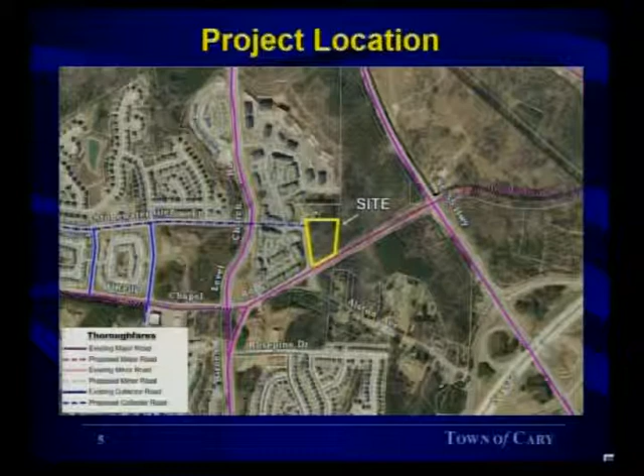Existing conditions, like I said before, it's already under construction. We don't have a good aerial photo. The site plan 13 SPO 35 was approved by the town in December of 2013 administratively. That plan was for a 16,000 square foot daycare, which is the larger building located toward the intersection, and an additional 12,000 square foot of office located toward the rear of the property.

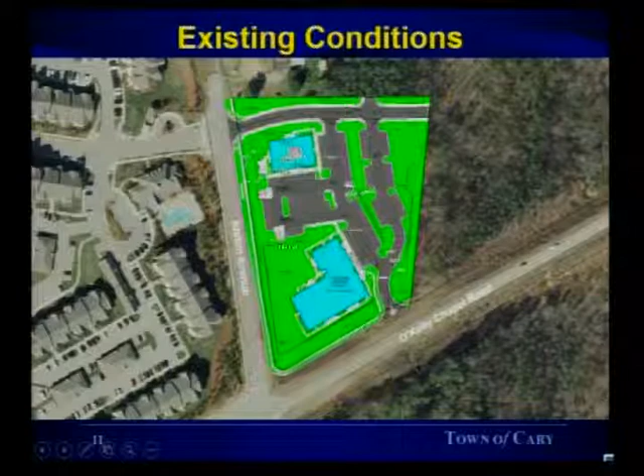To give you an idea what that looks like, this is a shot from the intersection of Alston and O'Kelly Chapel Road looking east toward Parkside Town Commons. The daycare building is shown there on the downhill side of the property. You see a little bit of the widening that was done on O'Kelly Chapel Road. And then the office pad would be in the rear of the building, and the playground is currently under construction, the playground area for the daycare.

So as part of that original plan approval in December of 2013, the applicant was required to show a reclaimed water line, approximately 459 feet of 12-inch reclaimed water line along the southern property frontage. They chose during the plan approval process to put that on the southern side of O'Kelly Chapel Road, and that's shown in the approximate location of the yellow dashed line on this plan.

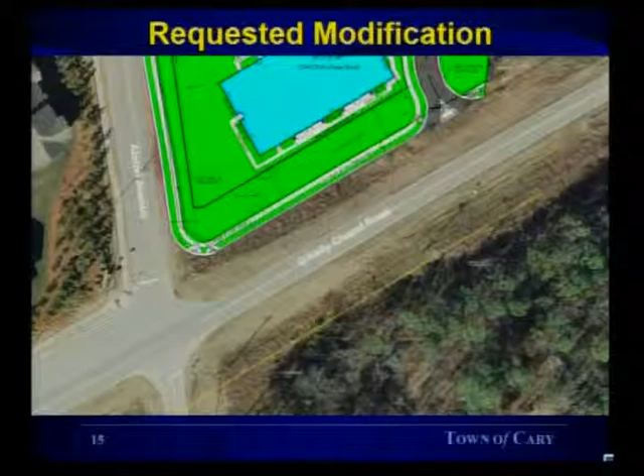The applicant is before you tonight requesting to modify that approved site plan to remove that reclaimed water line and to make no payment in lieu of construction of that water line. That concludes staff's presentation. We'll bring the applicant up at this time, and then staff will be back to provide their professional observations following the applicant's presentation.

Thank you. Thank you, Mr. Hales. At this time, we'll call on the applicant's attorney to present arguments and evidence in support of the application by addressing the applicable approval criteria.

Thank you, Mr. Mayor, members of the council. Jason Barron with Morningstar Law Group here on behalf of the applicant. Here with me tonight is Mr. Bill Daniel, Bill Daniel and Associates. They're the engineers for this plan.

I don't quibble with the presentation that Kevin gave with respect to ultimately what the request is. Essentially this is a request for approval of a site plan modification, but it comes down to this reclaimed water line, which you can see on the slide is on property owned by third parties.

Pursuant to the town's policy statement 132, included in the staff's presentation, developers of property in areas designated for reclaimed water lines are responsible for the full cost of reclaimed water facilities within their own properties. This clearly is not on their own property. The real genesis of this request is they don't own it, so they don't have the ability to deliver the line in question.

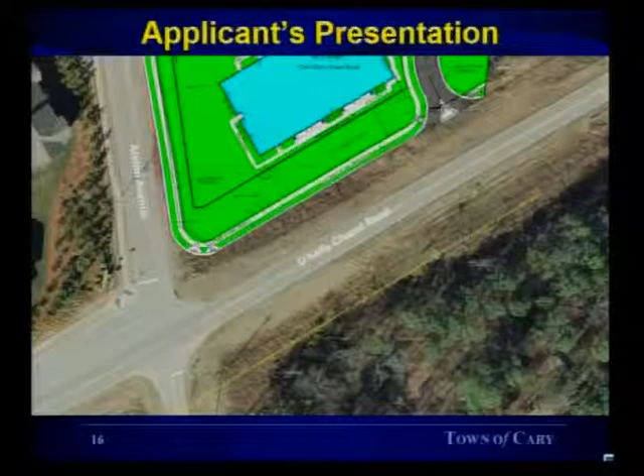So the reason why the reclaimed water line is shown on the south side of O'Kelly Chapel Road is because that's where the reclaimed water line is. That's where Evans Farms Townhomes is building it, and at some point, I imagine, it will be extended across, under Alston Avenue and along the south side of O'Kelly Chapel Road as well.

So it was a change made to the plans during the planning process, but the genesis for that change was reflecting the fact that MI was putting that reclaimed water line on the south side of O'Kelly Chapel Road. So from my client's perspective, that is the justification for not requiring this owner and applicant to put that line in—because they don't own it, and the reason they don't own it is because it's planned to go across property owned by third parties. So with that, I will call Mr. Bill Daniel to testify as to the plan's compliance with the other requirements for approval of a site plan.

Good evening. My name is Bill Daniel with William G. Daniel and Associates, engineers for the project. Even though I know the real focus here is on the water line, I understand the process is essentially a reapproval of the site plan, so the features included in the site plan need to be addressed in the record. I will, in a rather stilted fashion, address those items briefly.

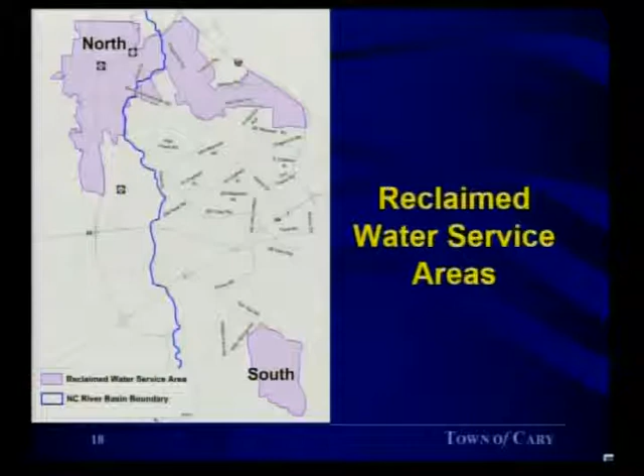This is a clip, the second slide, from the town's master plan, which shows the location of the site. All-Starz is located on O'Kelly Chapel Road, which the master plan calls for a 12-inch water line to be installed.

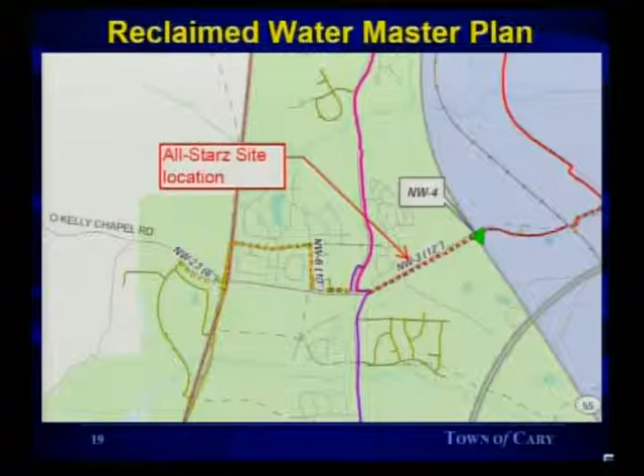With the one large parcel to the east that could develop in the near future, if this line is not constructed, there would be a significant gap in the system, which would feed live reclaimed water all the way from Green Level Church Road down to Parkside Town Commons, the large commercial development down at 55.

If this waiver is granted, the town would have to construct this line at an estimated cost of up to $60,000. And with that, I'll turn it back over to Mr. Hales.

Just to summarize for council, there are two decisions before you tonight. The first being the request for the waiver to the reclaimed water line with no payment in lieu. Mr. Bissonnette just covered a lot of the staff observations, so I won't repeat them here. The second would be an action on the site plan itself, which really the only difference between the new site plan and the old one is the elimination of the reclaimed water line. If you have any questions, we'll be available. Thank you. Okay, thank you.

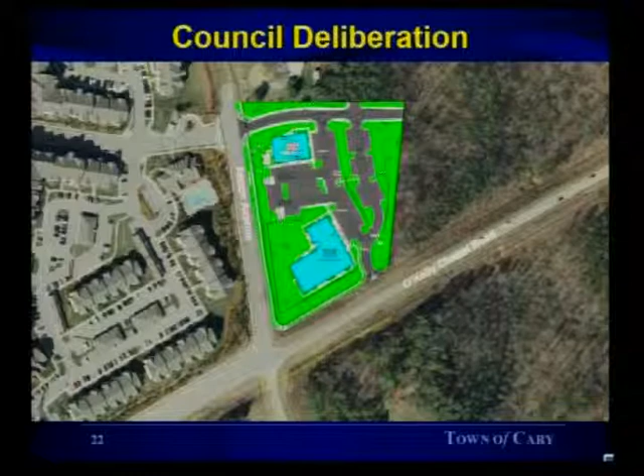Can you put back the last page that Mr. Hales had up there? The modification summary or the area? The summary, yes, that one. Thank you. Okay, thank you.

At this time, I'll invite cross-examination of the town witnesses. Mr. Barron? Nope? Okay. If anyone's been sworn in and has objections to the competency of any testimony, I'd invite you forward. Does either party believe that new evidence has been presented tonight that warrants a continuance of the hearing? Okay, continuing, we'll now begin the deliberative phase of the hearing.

Do council members have questions or comments? I have questions. One of the statements made is that the applicant feels like they have paid in more because they had to tie into a road that is centered on the easement, the road easement, versus having the two lanes. My question is, why aren't we requiring the developers along that corridor to widen the road to its future corridor?

They are. It's an existing two-lane road today. It's proposed to be a 4-lane median divided facility, so they were required to widen two additional lanes outside the existing lane.

Are they doing that? Correct, they are making road improvements consistent with the CTP. So they're doing their road requirement, and if they're doing their road requirement, there's no extra cost then of tying in further to what they need to tie in.

Correct, and here's a better shot. I didn't include it earlier, but it shows the additional two lanes of widening with the new curb and gutter. And when did they come in and ask you for this line to be moved to the other side of the street? It was part of the original approval. It hadn't been changed since.

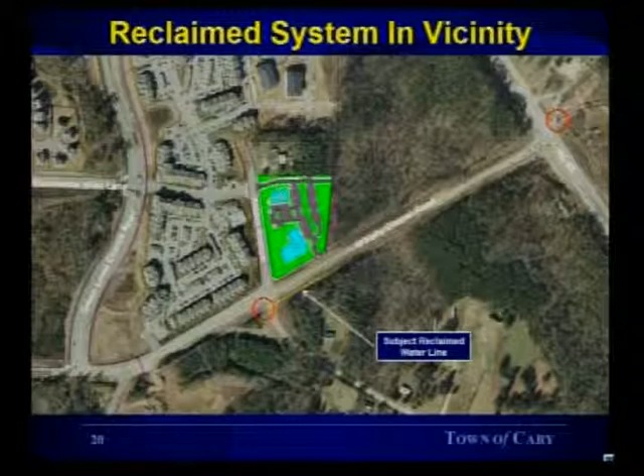But in this particular case, the one thing that is clear to us is the reclaimed water line needed to be on the other side of the road. Now, with it being on the other side of the road, you've got to think about placement. This road is going to be much wider than it is now. We had to dedicate considerable right-of-way and make considerable widenings because the existing roadway is essentially going to be a median in the ultimate section. We had to build the section that's going to exist outside that, more or less. That's really a bit of an overstatement, but it's not far off.

And now with the water line on the other side of the road and that being an undeveloped parcel, it needs to go on that side of the road, but that parcel is not ready to develop. When that parcel is ready to develop, they will have to dedicate additional right-of-way. They will have to build additional roadway, and the water line needs to be installed not next to the existing right-of-way that's there now, because that's going to be under pavement. It needs to be constructed farther to the south than the existing right-of-way.

It needs to be constructed just off of where the ultimate right-of-way is going to be. And that water line needs to be constructed and designed in concert and coordination with the water lines, sewer lines, storm drain, everything that's involved in the improvement of frontages along that road. It logically needs to be constructed as a part of the development that occurs on property across which it's going. And that's the reason we requested the shift, and I think that's the logic.

Now, in all fairness, during the review process, we knew that that was going to be the case. We thought this would all be developed at the rate everything was happening out here. We thought this would probably be a moot point because we thought with the speed of development that water line would be installed. And that is the case with the part through the townhome. And I understand there's considerable interest down here in this larger tract. But our tract has developed faster than that corner parcel.

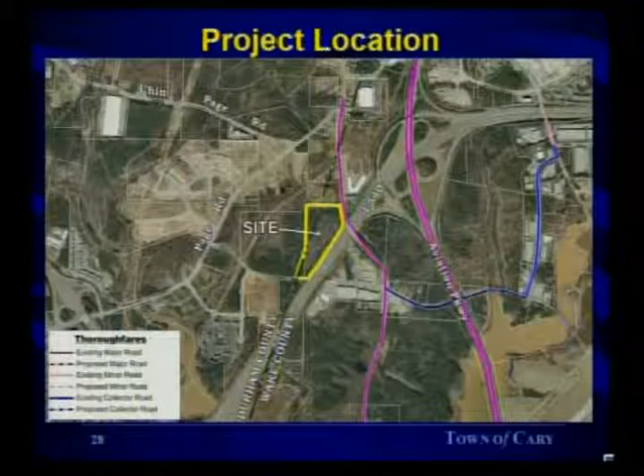The site is currently wooded, it's forested. There are 2 large diameter potential champion trees located in this corner of the site near the overpass. They're not proposing any development in that portion of the site, and those trees are to be preserved on the property.

The request is for a site plan for approval of a 102,000 square foot school. The site has access from both Pleasant Grove Church Road in the northeast and Comstock Road coming out of Durham County to the south. The road access off of Pleasant Grove Church will predominantly be for parents and student drop-off, and bus access will be from the southern part of the property. Stormwater treatment will be handled in a stormwater device within the bus loop.

The portion in Durham County, you'll notice, has no buildings or structure improvements. It's being used strictly for emergency access to the rear of the building and for queuing during the parent drop-off and pickup times.

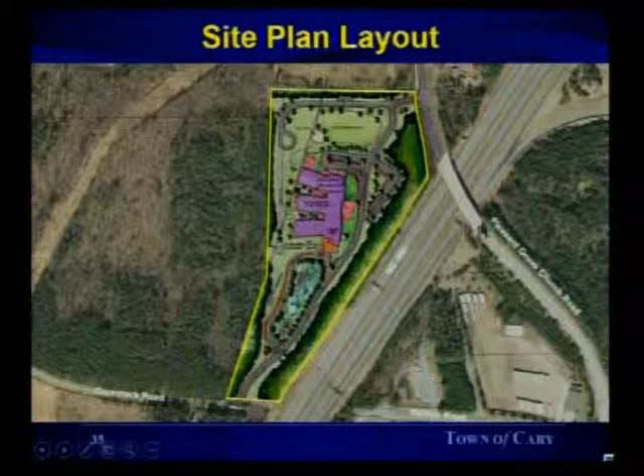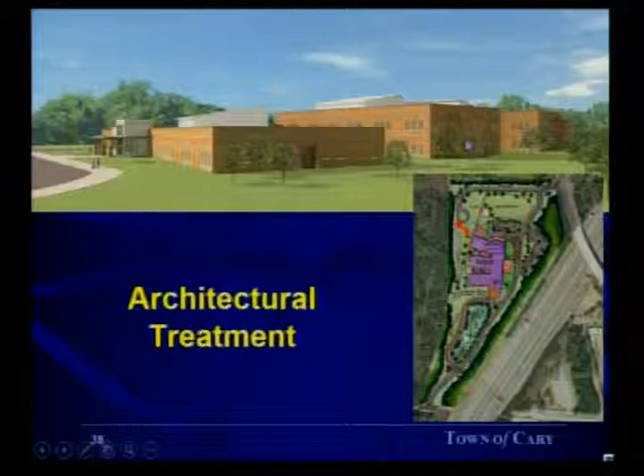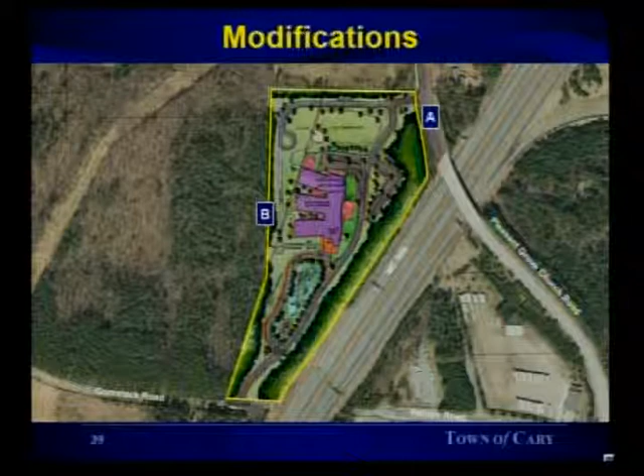The site plan does include 2 modifications to the town's development regulations. Modification A is a request for a payment in lieu for half of the median required in Pleasant Grove Church Road, as well as sidewalk from the property line, or from the access drive headed south toward the bridge. The second is an elimination of connectivity to the west, to the vacant property to the west in Durham.

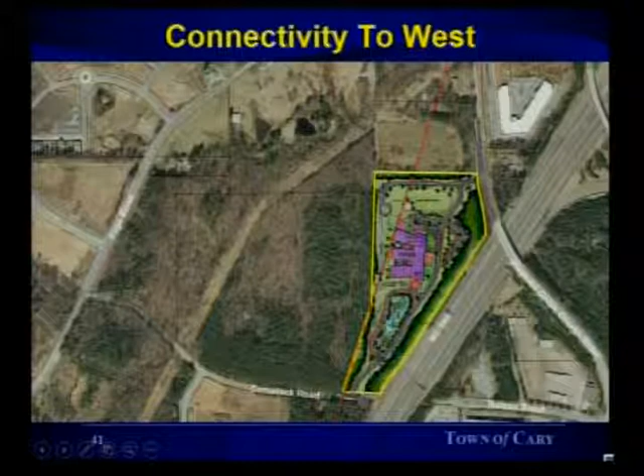That concludes staff's presentation this time. We'll be back after the applicant's presentation to provide you some additional observations. Thank you. This time we'll call on the applicant's attorney to present arguments and evidence in support of the application by addressing the applicable approval criteria.

Good evening, Mr. Mayor and members of the Town Council. My name is Kenneth Haywood, Post Office Box 1429 in Raleigh. I am with the law firm of Boxley, Bolton, Garber, and Haywood, and I'm very pleased to be before you again tonight with another school to talk to you about in terms of the town of Cary.

I am here on behalf of the Wake County Board of Education to talk to you about an elementary school tonight.

There are, as you have heard from staff, a number of different requests and approvals before you. Let me very quickly talk to you about some of the individuals we have tonight that will be presenting evidence in support of these requests before you.

We have Ken Loring, who is a civil engineer with CLH Design, Renee Pfeiffer, who is a landscape architect and site designer with CLH Design. We have Jeff Hockendale with SEPI Engineering. We have Jim Copeland, Mosley Architects. We have Sherry Green and Betty Parker with the Wake County School System. We have Michael Moore, who's a state certified general appraiser, to talk in terms of real estate appraisal information.

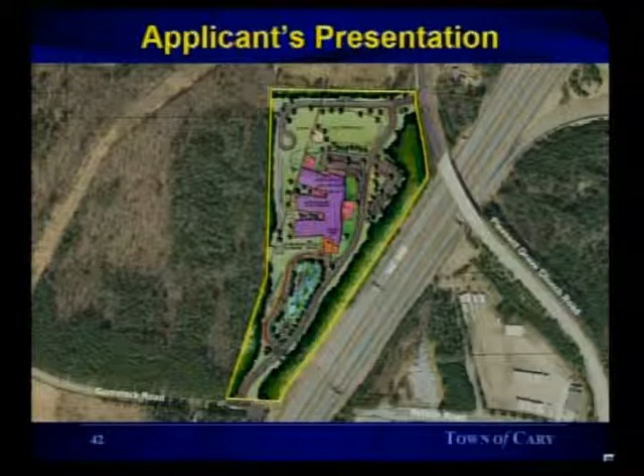At this point, I'll hand it over to our traffic engineer, Jeff Hokenottle, to discuss some additional roadway improvements. Thank you.

Hi, my name is Jeff Hokenottle. I work with SEPI Engineering. I am SEPI Engineering's Traffic Engineering Department Manager. I have 15 years of experience in traffic engineering, and I'm a registered professional engineer in North Carolina.

We conducted the traffic study, and as mentioned several times, we included a 900-student core capacity, so we looked at all future trips from this site. The study was completed and reviewed by the Division 5, District 1, District 2 engineers, congestion management, MSTA section, City of Durham, and Town of Cary, and has been reviewed and approved to help mitigate congestion as shown in the map. I'll start with the intersection at World Trade and Page Road.

The green improvements shown, as well as the blue, are the responsibility of Wake County Public Schools. Looking at Page Road and World Trade Boulevard, we'll monitor the intersection for signalization. We're going to be restriping World Trade Boulevard to include 200 feet of storage for a left turn lane, as well as a shared left and right turn lane at that location.

As Renee mentioned, we're going to construct a 100-foot storage southbound right turn lane at site driveway 1, and a northbound left turn lane at site driveway 1 as well, and construct a cul-de-sac on Comstock Road. The red and yellow improvement requirements are to be completed by an adjacent development, with Wake County Public Schools to participate in either funding of those improvements.

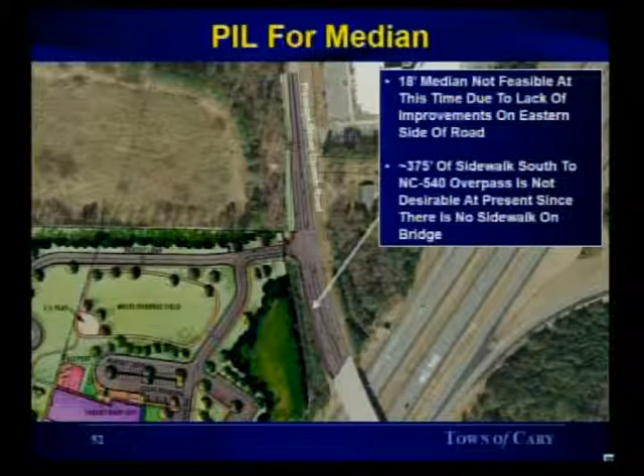The sidewalk to the south—there is no sidewalk farther south along Pleasant Grove Church Road, or more importantly, crossing the bridge itself. So any sidewalk provided along this frontage would dump pedestrians directly into the travel lane on the bridge. There's no provision for a pedestrian there, so that just is not desirable at this time.

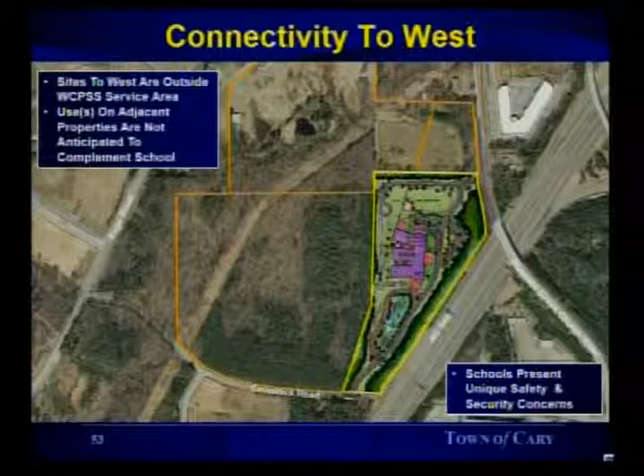Connectivity to the west—again, it's a school. The surrounding property is not really zoned or anticipated to develop with uses that are compatible to that type of use, as well as the unique safety and security concerns with controlling access to a school campus. That concludes staff's observations this time. We'll be available if you have any questions.

Thank you. Okay, this time I'd invite any cross-examination of staff's comments. No? All right. We'll now invite anyone who's been sworn in if they have any objections to the competency of evidence or testimony. Seeing none, does either party believe information's been presented tonight for a continuance of this hearing?

We'll now begin the deliberative phase of the hearing. Council members, questions or comments?

I think, and maybe Kevin you could correct me, but by annexing this property, Cary is now entering into the third county. Is that right? Have we already been in Durham County before? We're not annexing the Durham County property, we're annexing the portion that stops at the Wake County line. So we don't annex the whole site, just right up to that line? Correct. That's interesting, there's a property line there.

But does our site plan include the Durham County portion or not? It technically does not, but it does include it for informational purposes. You'll see attached to the staff report that Durham County has actually already approved that portion. Ah, okay, that's interesting. I guess it doesn't make a difference to us since it's not taxable property in any way. Other questions or comments?

If not, we can close the public comment portion of the hearing and ask council for motions. First, to annex. I make a motion to approve the annexation, 14A-11. Second. There's a motion and a second. Discussion? All in favor, please say aye. Aye. Any opposed? Motion carries.

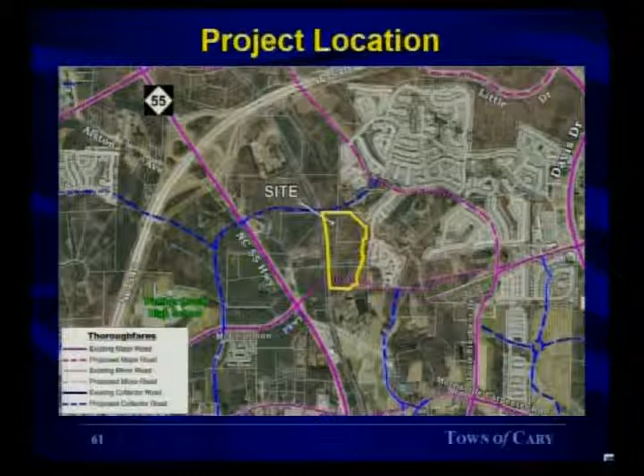There are no Parks and Recreation and Cultural Resources master plan improvements identified that affect this site directly. For informational purposes, there is a proposed greenway corridor that runs along the stream buffer separating the northeastern portion of the Phillips Place PDD from the remainder. That greenway easement was dedicated with the detached residential portion, and a small section of street-side trail was constructed along River Pine Drive at the stream crossing itself.

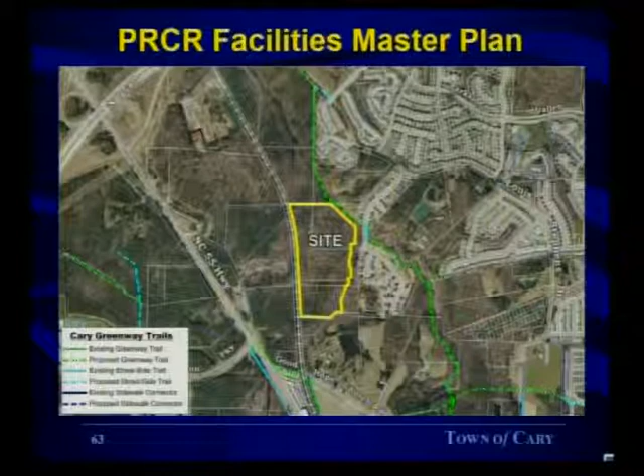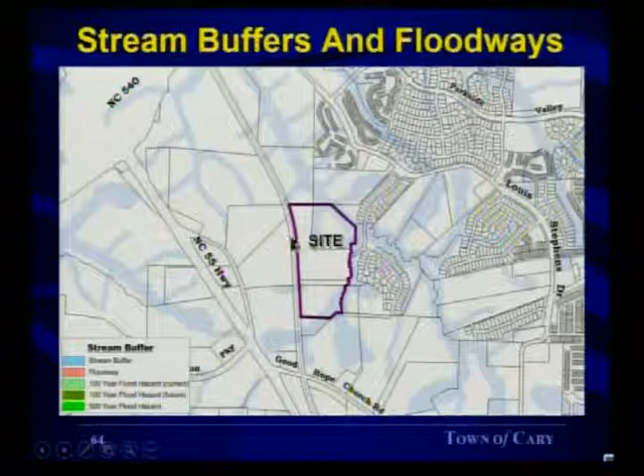This shows a portion of the stream buffers and the impact on development of the site. For whatever reason, our GIS maps have cut the stream buffers out here, but this stream buffer actually continues down and connects to this detached portion here, which we'll talk about a little later because it does play into some of the applicant's modification requests.

The site is currently wooded. River Pine Drive is constructed to the eastern side of the stream buffer that divides the detached residential product from the townhome product.

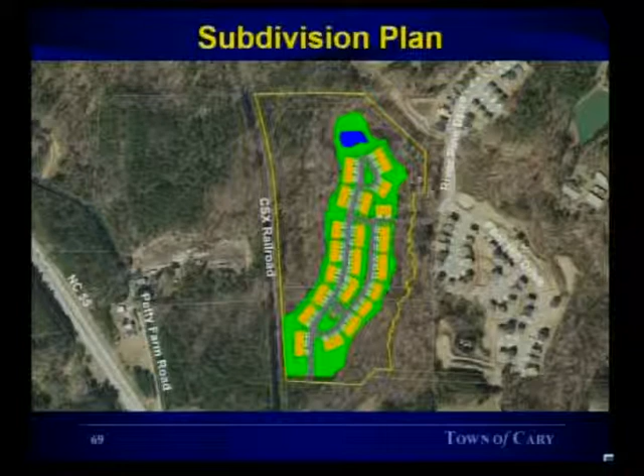The proposed subdivision plan is very similar to the plan that council saw in January of 2013, with a couple of notable differences when it comes to the modifications themselves: 106 townhomes arrayed, River Pine Drive extended into the site, then a couple of internal streets connecting down to the future McCrimmon Parkway corridor. Stormwater management is handled in the northern portion of the site where the two stream buffers converge.

Applicant is still requesting 5 modifications to the town's development standards. Modifications A and C relate to McCrimmon Parkway and the connection there. There is a connectivity modification regarding the number of units served off a single point of access, and then 2 connectivity waivers going to adjacent properties north and west.

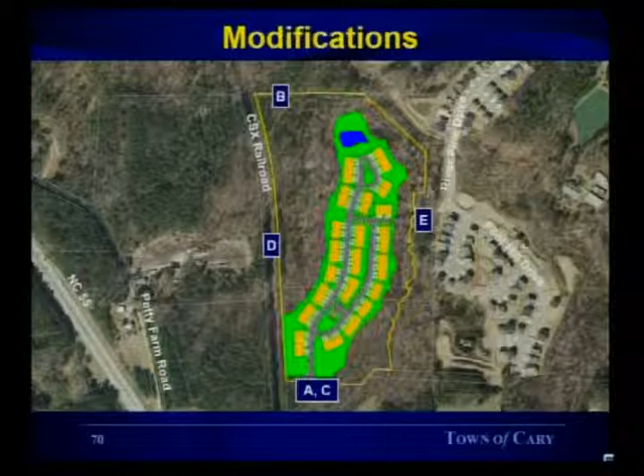Looking briefly at McCrimmon Parkway, there's an existing terminus right now where it connects to Louis Stephens Drive, and another on the western side where it intersects NC 55. At some point those two are projected to connect. The CSX Railroad corridor is obviously a significant impediment to that connection, just to give you an idea how that lays out.

The applicant is requesting a payment in lieu for half of the cross-section of McCrimmon Parkway. You can see here where the future McCrimmon Parkway alignment would be and where the applicant's property line falls. The applicant's request is that the town accept a payment of $285,216.20 in lieu of that construction.

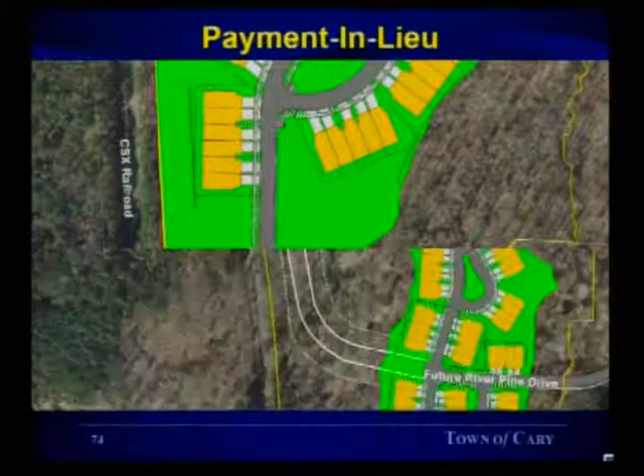Ordinance requires connections to adjacent properties every 1,250 to 1,500 feet. In this case, a connection to the north would have been required. I've drawn in here the approximate future Mahal Drive alignment based on the corridor comprehensive transportation plan and the projected plans submitted and approved for Brickyard. River Pine Drive would extend and go to the north.

Rather than construct that, they have requested the town accept dedication of right-of-way shown in the solid white lines and dedication of necessary construction easements to allow construction of that road in the future. However, they've not proposed to make any financial guarantee or payment in lieu, nor do any construction beyond where River Pine Drive intersects their north-south internal street.

In connection to the south, and as mentioned in the staff report, this isn't actually the applicant's request. This is a staff observation based on the plan they've drawn. McCrimmon Parkway has to cross CSX Railroad, which will make this a grade separated crossing. With all of our experience dealing with the railroad, it's unlikely they'll be able to secure an at-grade crossing in that location, which is going to put McCrimmon Parkway, where they're showing their flare turnouts to connect, at a significant grade difference. That connection is probably not going to happen as shown on the plans.

Connection to the west is fairly straightforward, with the CSX Railroad again being a fairly significant impediment to connections to the west. And with the future Mahal Drive and McCrimmon Parkway to the south, is it necessary to have a local connection? And finally, the number of units served off a single point of access.

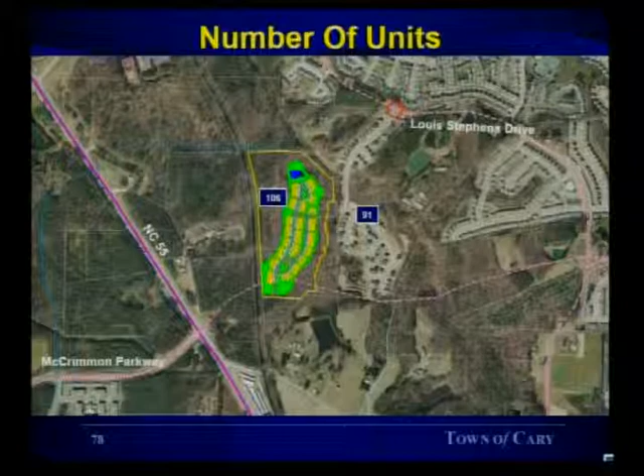That concludes staff's presentation at this time. We'll be back following the applicant's presentation to provide some additional observations.

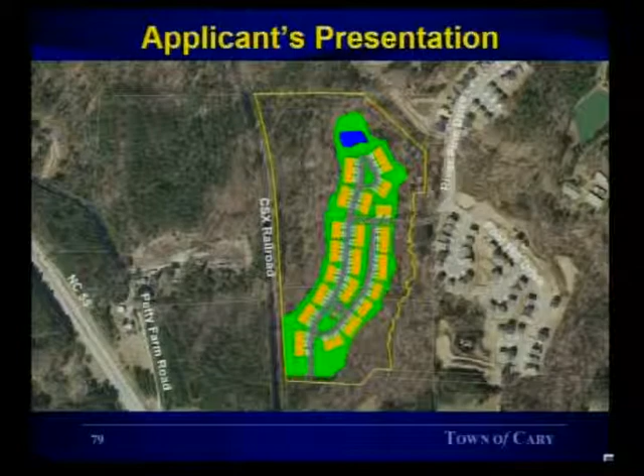That, in my opinion, is why the ordinance allows and contemplates this process we're in tonight - to acknowledge that there are times when the ordinance as written, and the policies developed by the town which make sense 99% of the time in the rest of the town, need a second look. Does it make sense to provide for a vehicular connection coming west off the site and heading north, essentially crossing and impacting two riparian buffers for what we believe would be an extremely limited benefit to the town? I'll allow our experts to talk in more detail about the associated modifications, but we believe strongly, and hope you'll agree, that this case makes sense.

At the end of the day, taking into account the hand everybody is dealt with its plan for townhomes - this is a lower density than what's approved by the master plan. We're developing the high and dry pieces, staying out of the environmentally sensitive pieces. We believe, and hope you'll agree, that this plan makes sense for this piece of property. With that, I'll close for now and hand it off to our first witness, Mr. Jim Canfield. Thank you.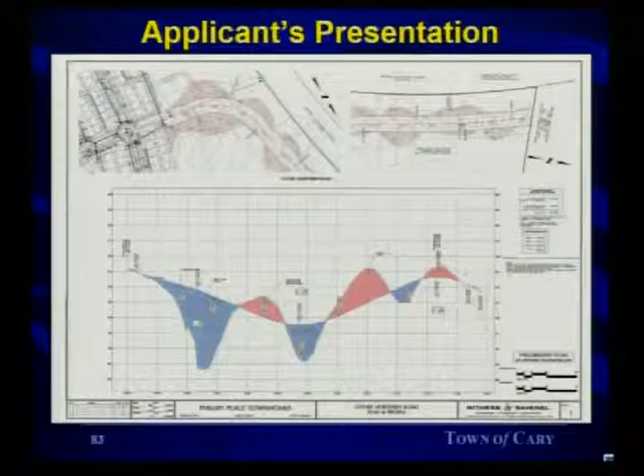Additionally, as the town is aware, because this road will not connect to another street at this time, we do not believe that NC DENR or the U.S. Army Corps of Engineers will approve the crossings at this time, if ever. Even if they would, we do not believe that this connection will ever be warranted in light of the significant environmental impacts required for the connection and the limited benefit to the community of having this connection.

At this time, I'll turn the presentation over to my colleague, John Anatola, who will provide additional testimony related to the minor modification and the plan's compliance with the site plan standards. Thank you.

Thank you, Jim, and good evening. As Jim stated, my name is John Anatola. I'm a professional engineer since 2006. I work at Withers and Ravenel.

I'm project manager over there in the land development section, and I am the engineer that prepared the plans that are before the council tonight. I graduated from North Carolina State University in 2000 with my BS in environmental engineering, and also graduated in 2002 with my Master's of Science.

I've worked on numerous single-family and townhome residential projects for approximately the last 8 years in different municipalities. To start with tonight, I would like to provide a summary of the subdivision that is basically shown on the screen here that is before you. As Jim indicated, this plan seeks to develop 33 acres of land in the town for a total of 106 townhome units.

The subdivision in the site plan proposes to extend River Pine Drive, which ends right over here, from the existing Phillips Place subdivision to serve the new townhome community.

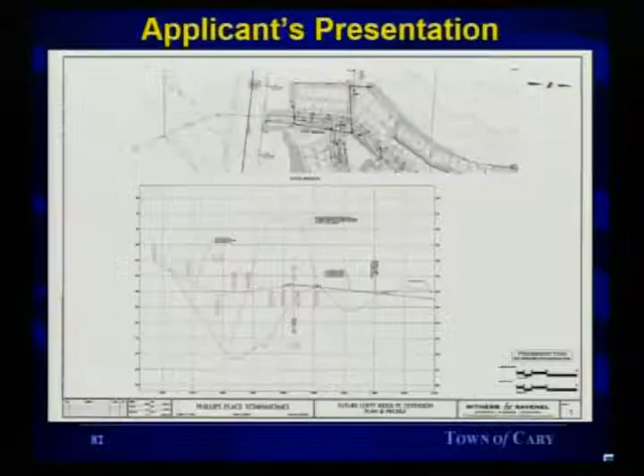We have worked with the fire and the police and have included a plan that will include a 20-foot wide paved emergency access road which extends approximately 1,750 linear feet from the end of Pilot Hill Drive and extends to Good Hope Church Road. That is shown right in this area right in here. That is where it ends right now, Pilot Hill, and then comes down here to Good Hope Church Road.

To prevent regular access, as Jim stated, or as Kevin stated and also Jason had stated before, there will be a siren-activated gate that will be provided at the northern end of Pilot Hill Drive in this location right around in here, just off of the property.

In all, police and fire have reviewed our plan that we have presented with our construction plans and are comfortable with it, including the emergency access that we have proposed now to be a 20-foot paved roadway. The Phillips Place PDD establishes the required buffers around the site and also the streetscapes for this project that are shown on the plans before the council.

In summary, the northern and eastern property lines, as Jim and Kevin had stated before, in this area here, those are urban transition buffers, which encompass the site right around in here, and the PDD did not contemplate any perimeter buffers in this location due to the fact that those urban transition buffers were there. Likewise, the northern portion of the property up in here is identified as open space in this northwestern portion, and it was dedicated as that in the PDD, and this also does not require any buffers from the adjacent CSX railroad, which is located over here.

There will be a 50-foot type A railroad buffer and a 50-foot type A streetscape provided in the southwestern portion of the site, buffering the townhomes from the CSX railroad corridor and the future McCrimmon Parkway. Those will be located in this area here, as well as located here. In addition to the perimeter buffers, a landscaping plan for the townhome development has been designed and provided in accordance with town ordinance and standards.

There will also be sanitary sewer lines, water lines, and reclaimed water lines installed within this development, and they are also being stubbed to adjacent properties. One stub for the sanitary sewer line will be in this area here, which will include an aerial sewer crossing due to the topography, as Jim had stated. The other one will be in this area right down here, and that will not be an aerial sewer crossing, but will be stubbed to that property line for future use.

First, there is a public street connection for the development from River Pine Drive, which connects to Louis Stephens Drive, as shown on this plan. In this location here is Louis Stephens Drive, which has been talked about earlier, and goes all the way down to the townhome development. Additionally, the development plans to provide a secondary paved emergency access to the overall site, which is currently not provided. That will be again in this location down here.

In consultation with the town's fire and police chiefs, and per the memo provided with the site plan itself, the plan proposes a 20-foot paved emergency access road within a 30-foot easement which extends approximately 1,750 linear feet from the end of Pilot Hill Drive to Good Hope Church Road. This improves the existing gravel access that is currently provided.

As noted on the plans, an access gate with a siren-operated sensor will be installed at the southernmost portion of Pilot Hill Drive to restrict non-emergency vehicles from using this route. The existing 20-foot gravel cell tower access, which sits in this 30-foot easement, will be paved in accordance with the Town of Cary fire lane standards to support emergency vehicles and otherwise improved as a secondary emergency access.

In addition, due to the nature of the surrounding properties, which are undeveloped, the lack of constructed public streets for access around the site, and the environmental features currently existing with stream buffers and UTBs surrounding the townhome portion of the Phillips Place PDD, there is a practical difficulty in locating alternative accesses to the site at this time. As proposed, I believe the goals and purposes of the ordinance are met with grant of this minor modification, as permitted by the LDO.

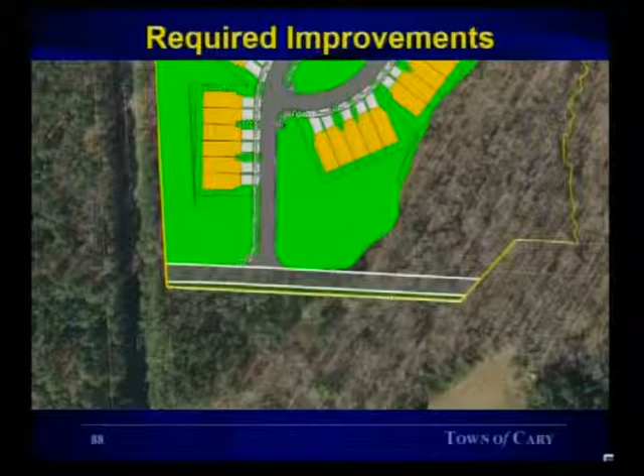Regarding the partial payment in lieu amount offered by the applicant, staff offers some level of support based on three main ideas. First, the size and intensity of the proposed development project provides a balanced approach and commitment toward meeting the town's transportation expectations. Secondly, the project will be paying transportation development fees as they develop this site, which can be applied to future thoroughfare projects, including the construction of McCrimmon Parkway. Lastly, a development project adjacent to a railroad with the need for a grade separation is a very unusual circumstance that we don't see very often, rarely encountered in other land development projects in Cary.

In regards to connectivity, I wanted to point out that in the immediate vicinity we have two east-west connecting roads. One is McCrimmon Parkway, and the other is a collector street. Both run from NC Highway 55 over to Louis Stephens Drive. Both streets are most likely also going to be required to have a grade separated structure with the CSX line.

Regarding the connectivity to the north, which we've discussed a little bit tonight, the applicant is volunteering to provide the necessary rights-of-way and easements for the future construction of this road if it's needed. The right-of-way will actually preserve the opportunity to have a connecting street in the future, if we so desire and it's needed.

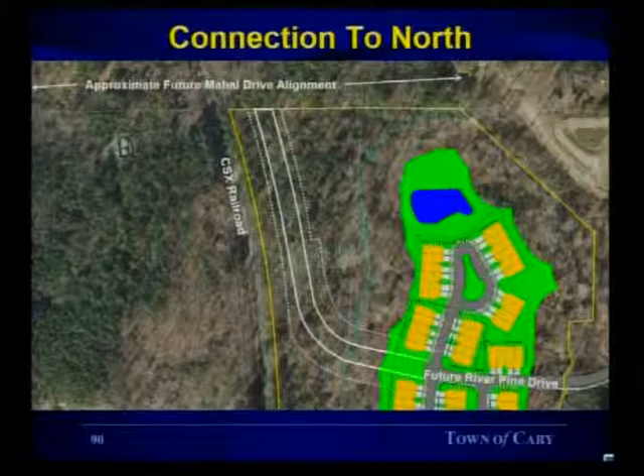As testimony tonight earlier by Mr. Canfield, he did talk about this northern stub road having some environmental impacts and features that must be dealt with as they contemplate construction of this road.

We'll point out to council there are two stream buffer crossings here. As Mr. Canfield testified earlier, and we have some concurrence, getting some level of acceptance by the Corps of Engineers to permit a crossing at this point in time is probably not feasible until the Corps has some level of comfort that this road can connect to another road and go somewhere. Given that there is no likelihood of going anywhere anytime soon, it's probably not a permissible crossing at this point in time, but that's not to say it can't occur in the future.

Also wanted to point out, as Mr. Canfield described, there is a significant amount of grading that's going to be needed, particularly to cross these stream buffers, as shown and identified by the red contour lines they have drawn on their plan.

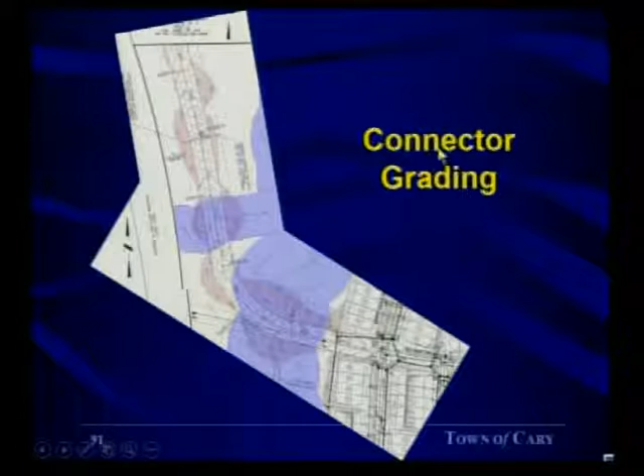This is also testimony Mr. Canfield gave earlier tonight. This shows the limits of cut and fill slopes along that corridor. Those cut and fill slopes range anywhere from 20 to 25 feet, which basically translates into extending outside of the right-of-way anywhere from 40 to 50 feet.

Lastly, I want to point out that we've talked a lot about Mahal Drive, the east-west collector street that would have to cross the CSX rail line. That's most likely going to be a grade separated structure, probably somewhere between 18 and 20 feet above the natural track grade. As shown on this slide where I have my pointer, that's at the top of that 18 feet.

That is about where the grade of Mahal Drive would come in as it approaches this stub local street.

So the likelihood of being able to bring that road up to a level to meet Mahal Drive is probably unlikely. There is an opportunity to continue that local road to neighboring properties to the north, but it would probably require some level of a grade-separated structure for that local street going underneath Mahal Drive.

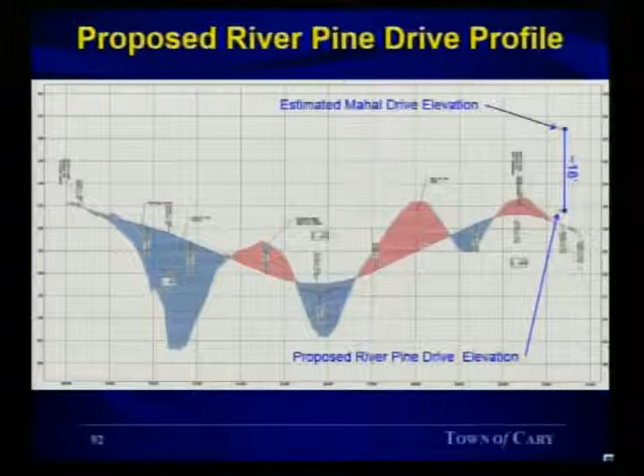I want to talk a little about the connection to McCrimmon Parkway. The takeaway is that the grading plan developed for this site assumes McCrimmon Parkway will have an at-grade crossing with the CSX line, but we've already discussed at great length that this is probably unlikely, so the opportunity to connect to that road is probably non-existent.

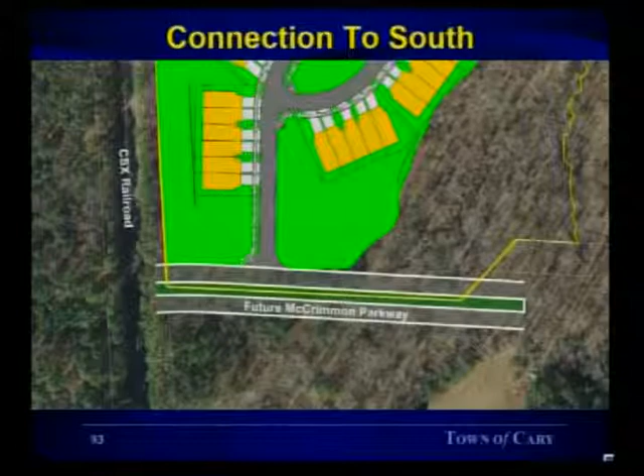This graphic is testimony provided by Mr. Canfield, showing the vertical separation between McCrimmon Parkway and where the road is currently being planned, about 21 feet. To plan for the likelihood of making a connection to McCrimmon would mean they'd need to raise the whole site up 20 feet just to match grade. If you envision that on a site plan, it would require an extensive amount of additional grading.

It's not to say this road could not be extended further south in the future, similar to Mahal Drive, with some other type of grade-separated structure continuing to the south, but they have preserved that opportunity as well.

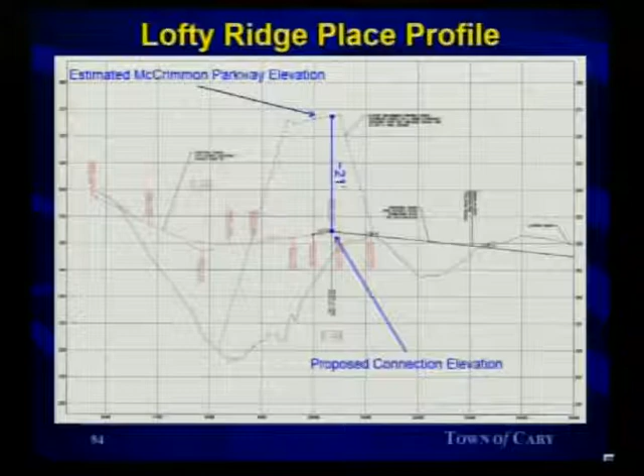There has also been a request for a modification to the stub-end street to the west from the CSX Railroad. Staff feels comfortable that McCrimmon Parkway and the east-west collector street provide enough connectivity in that area, so we don't need to cross the CSX rail line at an additional point there.

That concludes my observations, and Mr. Hales will provide some additional observations about the final modification they're requesting. Thank you.

I'll briefly go over the final modification, which is more than 100 units off a single point of access. As with their previous iteration of the plan in 2013, it's a multi-tiered request. Looking at the existing situation, there are 91 units in the detached residential portion of Phyllis Place, all served off Louis Stephens Drive.

There's no other access to the development at this time. The applicant is proposing to add an additional 106 townhomes off a single point of access on the extension of River Pine Drive, which just exacerbates the existing access issue on Louis Stephens Drive.

To mitigate some of that concern, the applicant has proposed the previously discussed asphalt emergency access, which will be gated so it's only used during emergency access, as a condition of their access easement. This does mitigate some of the larger concerns, but still leaves the 106 townhomes with a single point of access.

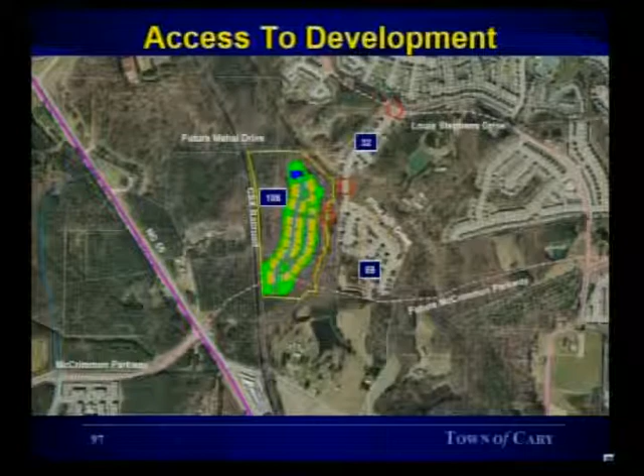As Mr. Jensen just discussed, connections to both the north and the south are very expensive, and more than likely, if they occur, will be grade-separated structures. Our best guess at this point is if they don't get made now, they probably won't in the future due to the environmental concerns and the cost of making those connections.

So looking at this modification, it will probably be a long-term, if not permanent, modification to keep 106 townhomes off that single point of access.

McCrimmon Parkway will come back down to grade, and the connection and extension of Pilot Hill Drive south, once the properties to the south develop, will provide long-term relief for the larger concern.

As mentioned by the applicant, there have been extensive conversations with the emergency service providing departments, police and fire, and the proposed access road, now paved with a siren-actuated gate, while not an ideal situation and not providing true access to a second public street, is a much better condition than previously proposed, and better than nothing. That concludes staff's observations at this time.

Here's a summary of the modifications. If you have any questions, I'll be glad to go over anything.

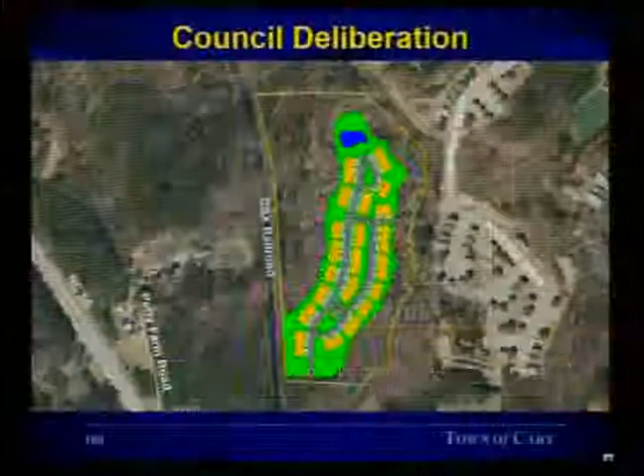Okay, what about up to the north? You're taking that connection of River Pine Drive and pulling it north to the west of the community, but you have that little blue BMP up there. I think that's a BMP. Yes, it is. Why wouldn't you just relocate that BMP and take the road up north to Mahal that way? Again, topography and urban transition buffers. We've got a 200-foot buffer there, and that BMP sits probably 25 to 30 feet below the site. It goes way down. So again, it's all dealing with the site topo.

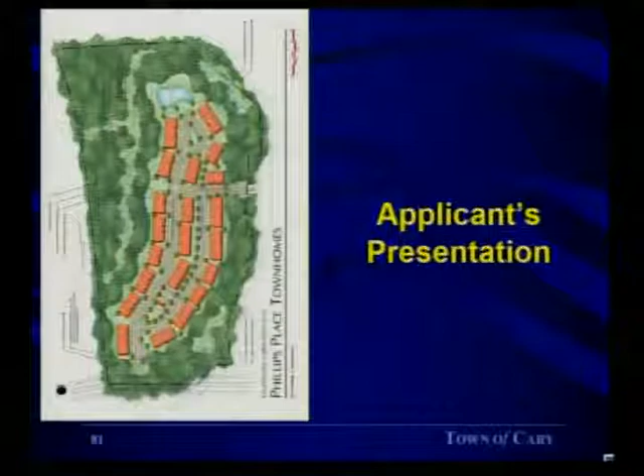But there you'd only have to cross one place, right? The other one would have to cross at two. That's correct. How seriously did you explore those opportunities? We've looked at just about everything. Trust me, we've been working on this for 2.5 years, and we've examined a multitude of different alternatives and different stub locations. What we have in front of you is really what we've ended up with after that long analysis.

Other questions, comments? I remember this one mainly because of the gravel road, which I didn't really like. I don't know if I asked the question before, but if I did, I can't remember the answer, so I want to ask it again. That 20-foot paved roadway, is that a permanent roadway easement? Is that something that could one day become a permanent road, or is this just some fire road that once the land to the south gets developed, might go away?

If you look at the comprehensive transportation plan, there's a proposed collector street that runs roughly along that alignment. It intersects on the plan, because it's a conceptual alignment, a little farther to the east. But I would anticipate that once that property redevelops in the future, and it's very large residential, so at some point the Pilot Hill Drive will extend down, that easement will go away, and access to the cell tower will be through the subdivision.

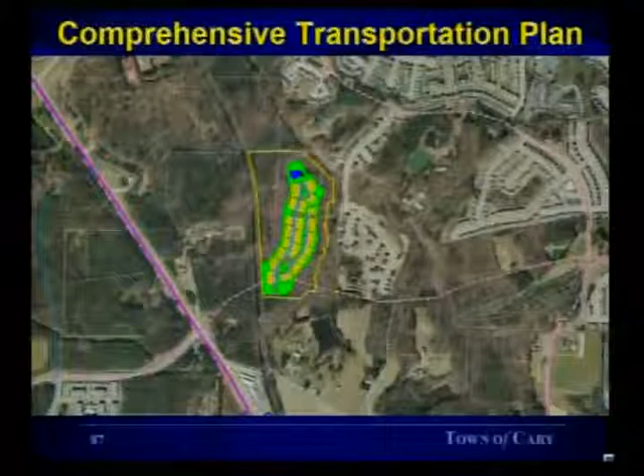But that's supposition, and Mr. Barron could speak to the terms of their easement. From what I've seen, if McCrimmon is built and comes across and intersects with that River Pine, Pilot Hill Drive, then their right to the easement extinguishes. So there's no right that the town would ever have in that easement area other than the rights they've been granted from the landowner for their emergency access road, but we would have no claim to ever building a road in that spot.

So the road could be permanent? No, it could not be permanent. It's an easement for emergency access purposes only, and once McCrimmon is built across and connects at that point, the easement extinguishes and goes away by the terms of the easement.

And that's correct. Now, from our perspective, once McCrimmon ties in, we have the second access that we need to support our development. And as Kevin alluded to, the town standards are such that when that property comes along, there is an improvement shown on the transportation plan that contemplates a road generally in this location where the emergency access is currently being provided. So at the end of the day, you do have a second access for emergency services, which we hope you'd never need. But when McCrimmon comes through, you will definitely have a second access.

Correct. Wait, when McCrimmon comes through, we may not definitely have an access. Yeah, because it'll connect to the north side of Pilot Hill Drive. You'll have a second access to the overall PDD, but it may not connect in the subdivision, in the townhomes. Correct.

Those are my two questions. Yeah, and I really appreciate the difficulties, I really do, but I cannot, in my right mind, approve a single access for basically a 200-unit cul-de-sac, and that's what I'm being asked to do. And I don't think it's safe, I don't think it's smart, I don't think it's good planning, and I'm not going to support it.